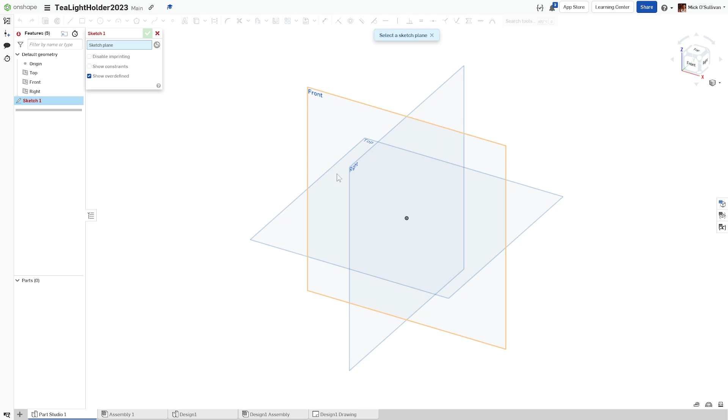I'm going to select the right plane. So I've got right plane there. If I wanted to change it, I'd just click on the little cross and pick another plane. But I want the right plane. That changes from red to black, means it's valid now. It's got a sketch on there.

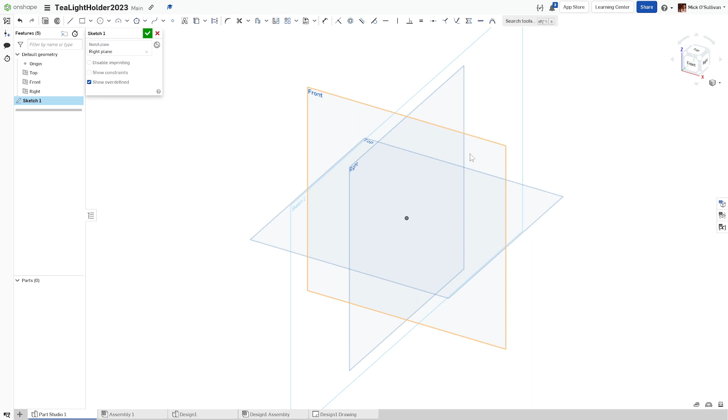I'm going to change over here and look straight down at my sketch by clicking on right there, and then I'll just zoom out a little bit so you can see I'm in the sketch, and I'm going to come up and draw the overall rectangle.

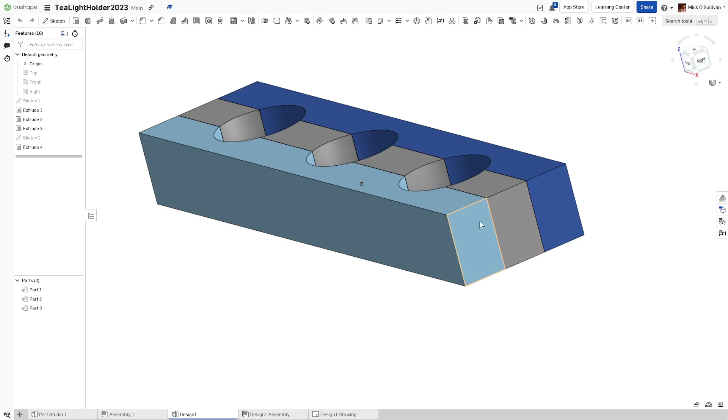I'm going to draw that big rectangle, all 3 of them in one go. So from this end here, and before you start on any design, you want to think about what the front of it is. So for me, I would consider that the front of my drawing.

When I do that, best practice would be to draw in the orientation that I want my finished object to be. It doesn't matter, it's not life or death, but it's going to make my life a lot easier.

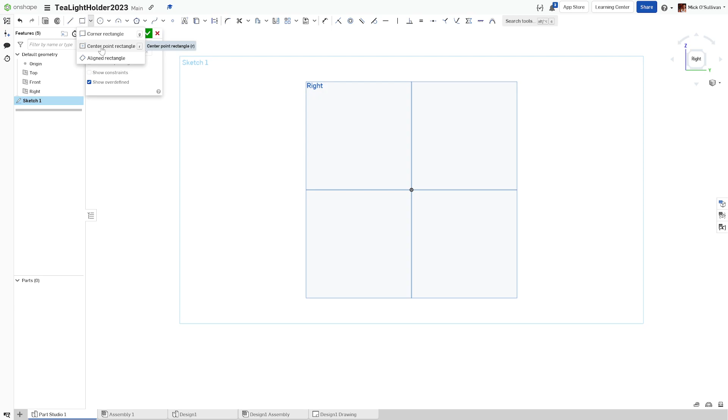So I'm going to change from rectangles, that's the shape I want, to a center point rectangle. The shortcut, if you look here, is the R key. I'm just going to select it, and I'm going to make that my center point, the origin. Click once, click again, and then I get a little box there.

Now, I told you it's going to be 19 mil thick timber, and there's going to be 3 pieces of it. I could use a calculator. I could do the calculations in my head. It's not a very hard calculation. Or I can go 3 times 19, and it'll do the math for me. Makes it a lot easier.

The height is going to be 30 mil. And I'm happy with that.

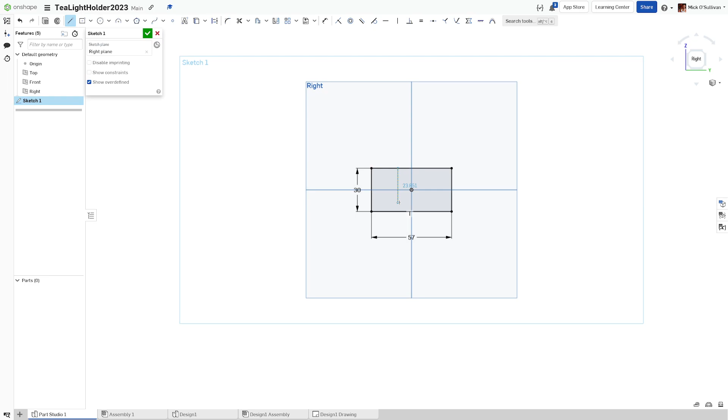Now I want to do those lines here and here to make it 3 pieces. So I'm going to take a line there. I'm going to draw a line from here. I'll see those little icons that appear. One means it's vertical, and the other means it's connecting with the orange line.

I'm not going to do it right in the middle because that will constrain it to the middle. See, the icon is middle. I don't want to do that.

I'm going to Control Z, press L for line, and draw from here to here. Make sure you see both those little icons, and not like this and not like that. See how the icons disappear when it comes like this? It's perfectly vertical and it's connecting.

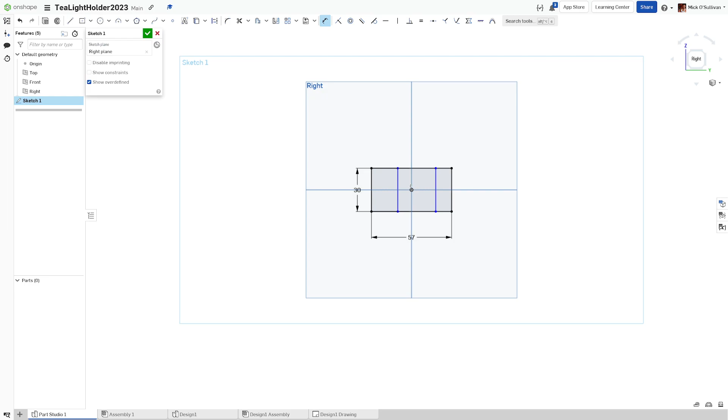Let go. I can't change that number because that is 30. I'm going to press D for dimension, and go from here to here is 19. I'm still on the dimension tool. I'll go from here to here, which is 19 again. That will automatically have to be 19 because I made the overall length 57. I'm happy with that. Tick.

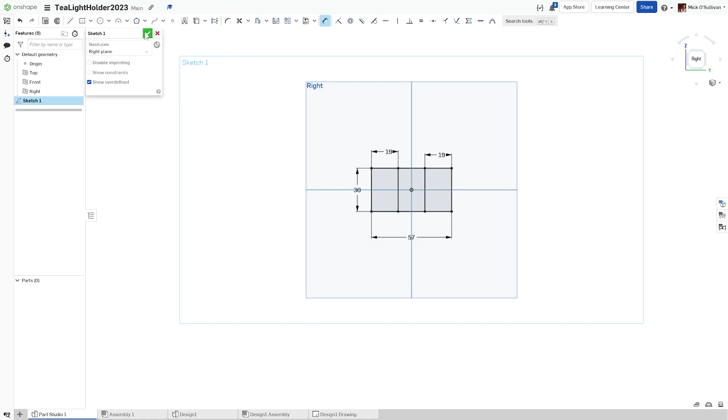The sketch is done. It's a 2D sketch with 3 rectangles all in the middle. I'm going to extrude it out, one at a time. First, I'll do that one. I know I want it to be about 250 mil long.

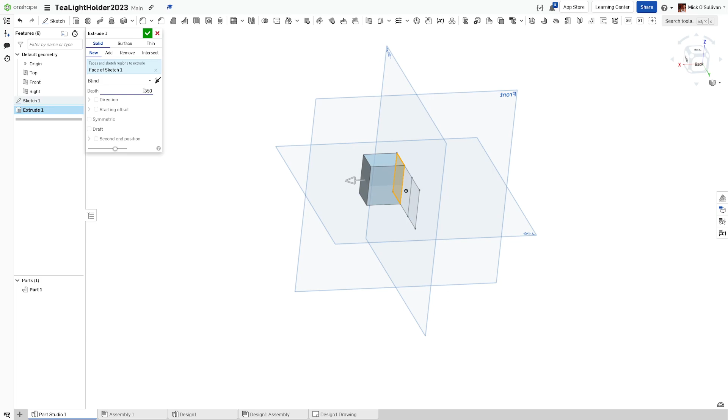And I have my part. I'm going to use a button I probably didn't cover in class - symmetric. If you can see what that has done, all it's doing now when I click symmetric is extruding really from the middle out both ways. There's a reason why I'm going to do that, and I'll tell you in a second.

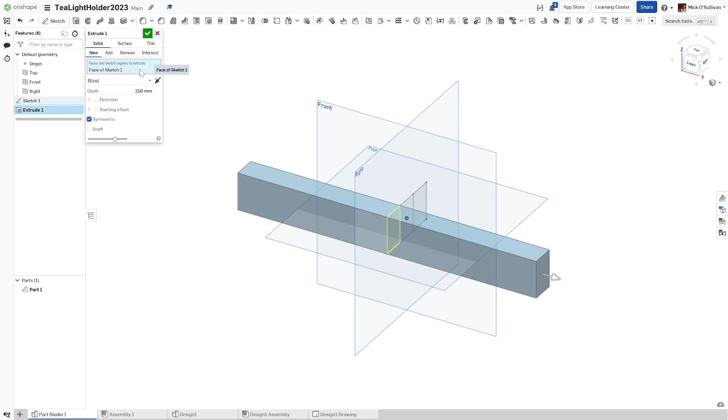I'm happy with that part. I'll tick, and I've got part 1 down here. That is it. Now, the sketch gets hidden by default, so I'm going to click on the eye icon next to the sketch and show it again. It was hidden, not deleted, just hidden. I'm going to do the same thing 2 more times.

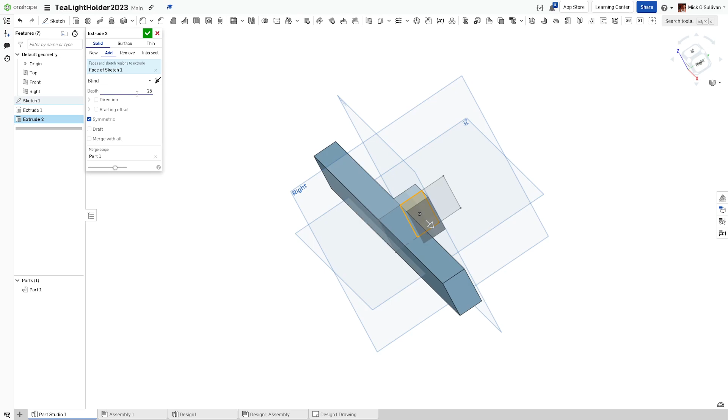So I'll extrude, click that middle rectangle, click symmetric, make it 250 - as you can see here, there's no second part there yet. I'm going to make it a new part, and look, I've got two parts. Tick. I'm going to do the same thing again.

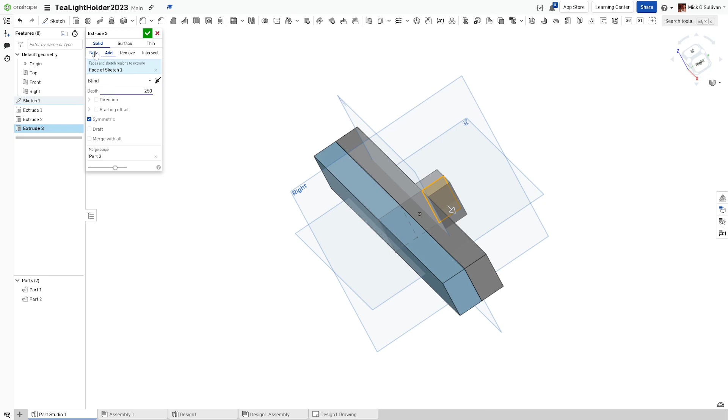So the rectangle I haven't done yet, symmetric, 250, new part 3. I've got 3 parts now. Tick.

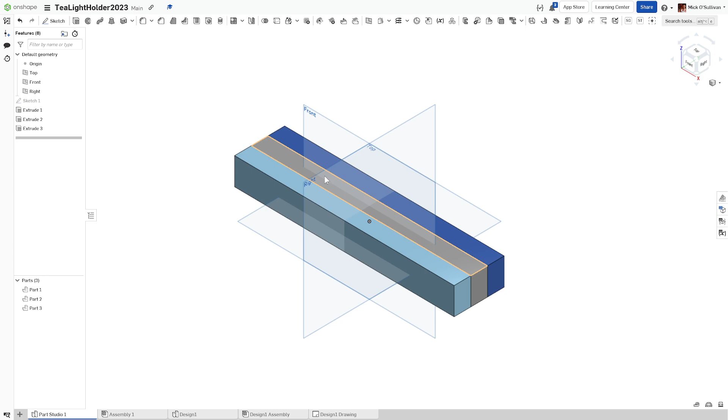So there we go, I'm going to look at it in isometric view. I'm happy with that. I won't need to use that sketch again, so maybe I'll hide it. While I'm at it, these planes - I don't need to look at them either, so I'm going to press P to hide them as well.

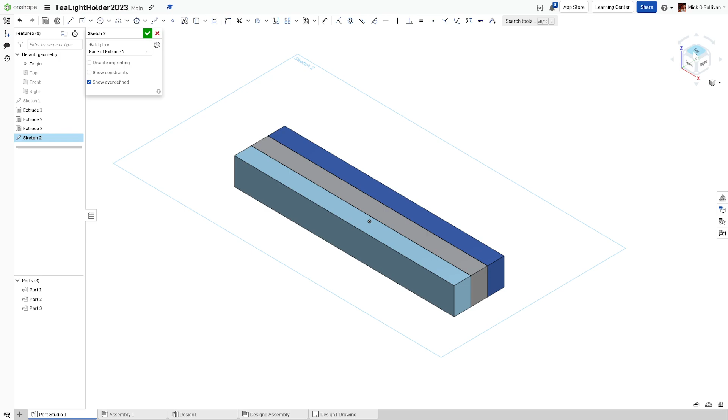Now let's do another sketch. This time the sketch is going to go on the very top face of one of these pieces. It doesn't really matter, but I'm going to do the middle one. I've got a sketch laid on top of it. I'm going to look straight down on it by pressing the N key, or I could click on top, or right click and go view normal to sketch plane.

There we go. Now, if I press P and show the planes, you can see I've got a plane going right through the middle - right through the middle. So that makes this a lot easier.

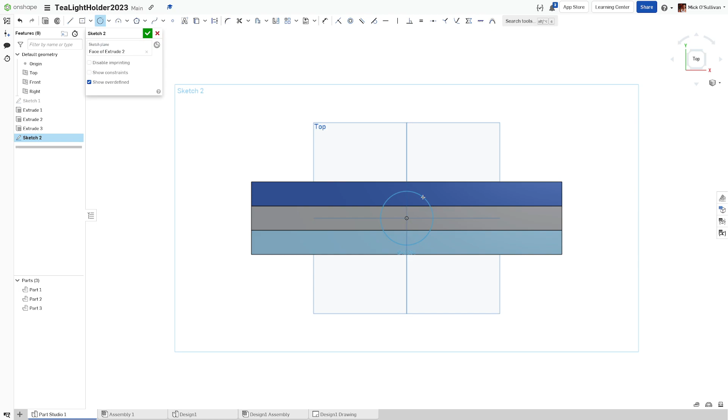I'm going to pick a circle, come right to the dead center. The middle one is going to be dead center. I'm going to bring it out a bit, click once, and type in the diameter, which is 38.

While I'm there, I'm going to come over here and do another one on this line. See the little icon means line, right on the edge of the plane, 38. And over here, same, 38. That's the size of the drill bit, that's the size of the candle.

I will need to dimension a few little things. That one there is locked in place. These two, if I click them and drag them, they can't move anywhere off that line, because the first time I started my circle, I started on the edge of that plane - they're locked into that position. I'd have to delete that constraint if I wanted them anywhere else.

Okay, I want them even. Now, I'm not going to do a lot of fancy mathematics. I'm going to take that dimension, drag it down the bottom here, drag this one down there, and that one down there.

I do notice a lot of students have it all bundled up together like that, and you want to be able to read it. You want to be able to make changes if you need to. So it needs to be clear.

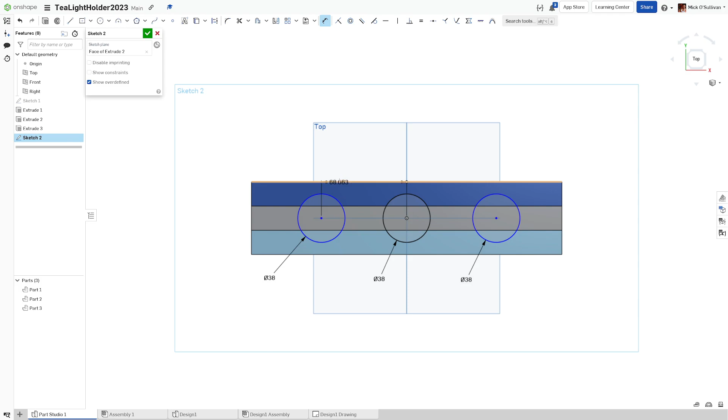Now, I could dimension from the end to here, but I think I'll use the center as my reference point. I'm going to make that 75. Seems like a good size. That looks like it gives me pretty good distance, but I could change it if I wanted to, 72, whatever.

Maybe for my design I want to go a bit further to the end. So I can change that, whatever I want. I'm going to keep it at 75 though.

And now while I'm still on dimension, I'm going to do the other side. From there to there, bring it up out of the way, 70 millimeters. Maybe I'll put that right in the middle. Okay, I'm pretty happy with that.

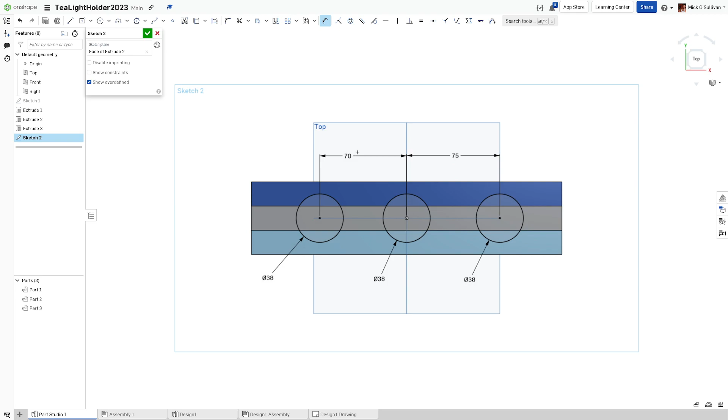On second thoughts, I'm going to give it another 5 mil away. I would assume for this design it would want to be symmetrical. And I'm going to go tick.

Now I'm going to go and remove that material. I'm going to glue it together, mark out where it goes, and then I'm going to drill it. So extrude, this time it's going to be remove, and I'm going to pick all these parts of the circle.

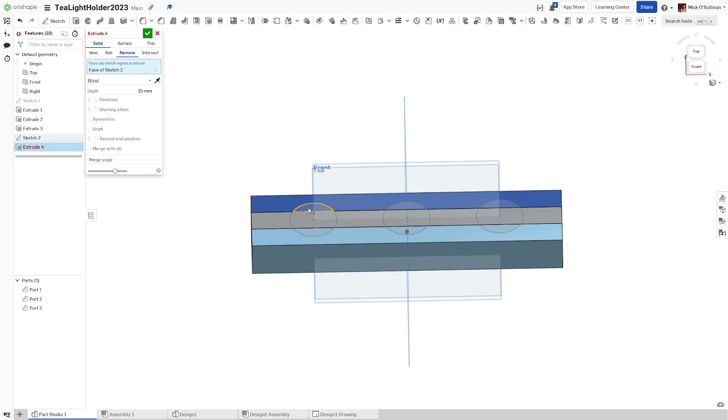There's really 3 parts to each circle now, because there's 3 parts in the job. So, like that.

I might show you from the side here. So I'll go to the front. I'll change my view on this little icon here to translucent. You can see it comes down 25 mil, so there's 5 mil space there. I could bring it down even further, all the way through if I wanted.

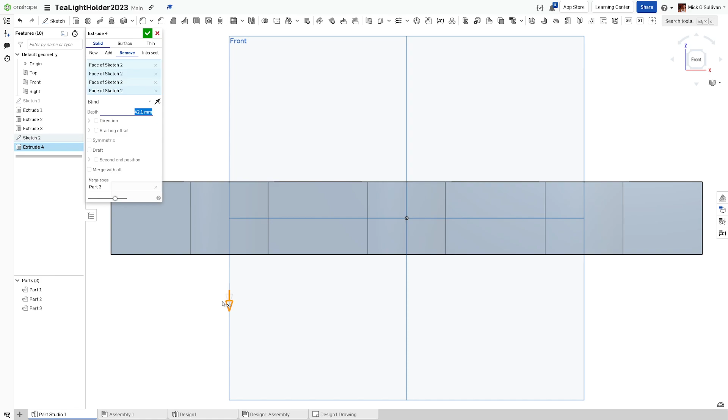I'm on remove. There is one thing I will have to do: click on merge with all, because at the moment the only part it's cutting into is part 3. I'm going to go merge with all.

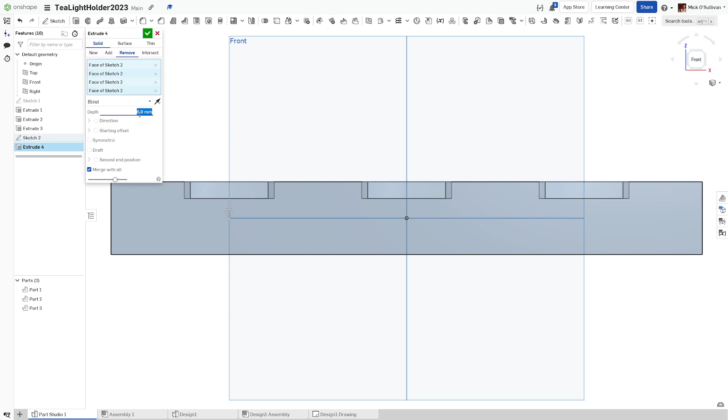Now I'm going to go back and look at the front. My candle is about 16 mil high, and I want it to be above the top face. I don't want it to sit flush or be under that face.

So I will take mine down about 12 mil. I'll set my drill press depth to go down 12 mil, no more, and it'll stop. Every time I drill these, they'll be the same height. And that means my candle will stick above that surface about 3 or 4 mil, and look pretty good and be

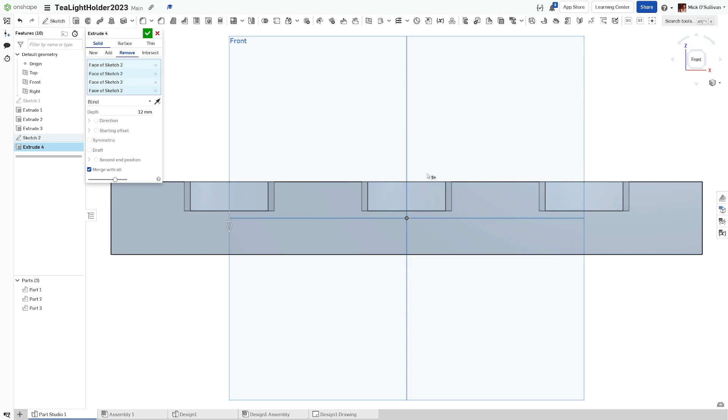easy to remove. Sorry. Okay, I'm going to cut down there 12 mil. And I think I'm happy with that.

I'm going to change my view so you can see it. Back to shaded. And go tick. I've got 3 holes.

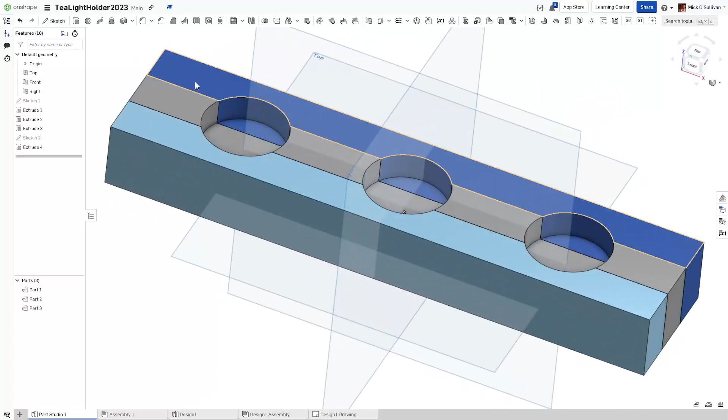Might hide the planes again so you can see. There we go. That's my basic design. I have 3 parts here.

Now, this is just the object, the modeled object, the model, the mesh. What I want to do is come into the assembly. It's not going to be very hard.

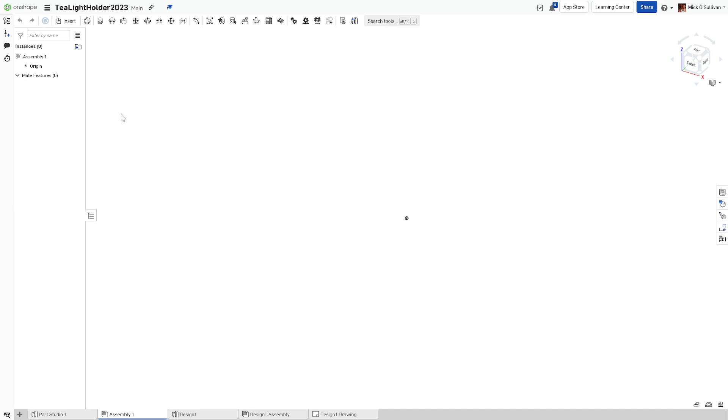And I'm going to go insert, part studio 1. You won't see that design one, that's the one I did down here. And I'm going to take part 1, part 2, part 3.

Now they look like they're together perfectly. But if I was to grab one, they're not glued.

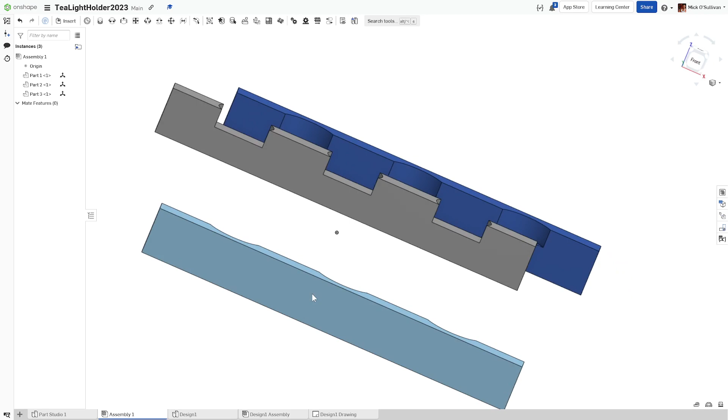The purpose of this, now we would drill it when it was glued together, but for this, we want to glue it together now. Okay, I'm going to use this little fasten mate tool up here.

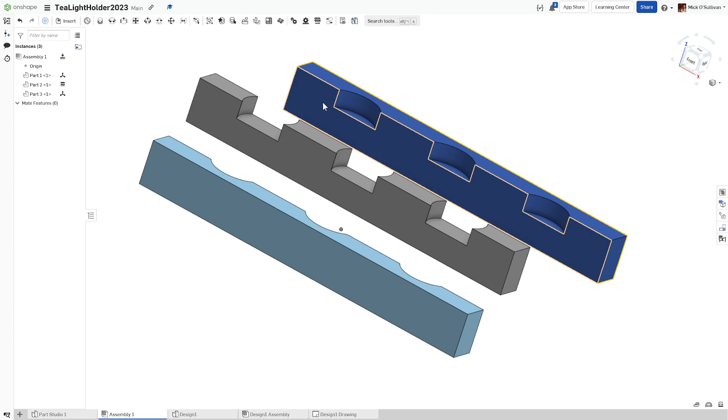But before I do that, what I'm going to do is pick one of them. It doesn't really matter which one, and I'm going to right click on it and go fix. Now that one won't move. It's locked in space, okay? Very useful when putting something together.

Going to go back and click fasten mate. It's red, it needs more information. It wants mate connectors. Now the way this works is when I hover over here, I get a lot of points of reference that I can connect to the other side.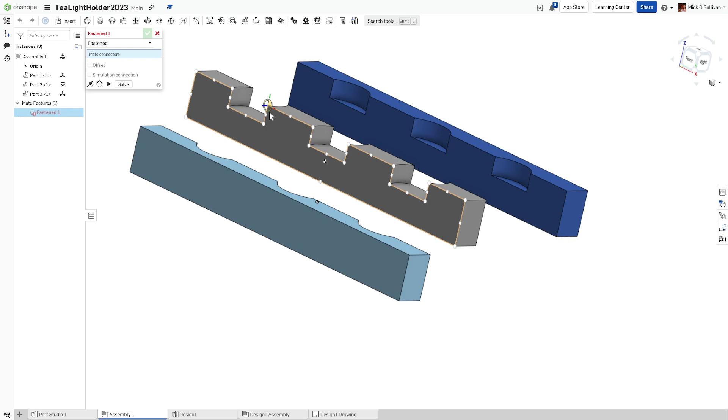That face there will be obviously that face there, identical. So I could pick heaps of different ones, and if I line them up exactly with their opposing position, it'll glue together.

Sometimes this tool can be hard, it flicks between faces. If I find the face I want to lock to, I hold down the shift key so I can move together. I could go from the middle, that'd be pretty useful, but I think it'll make more sense if I take this corner up here. So that corner is going to glue to that corner down here.

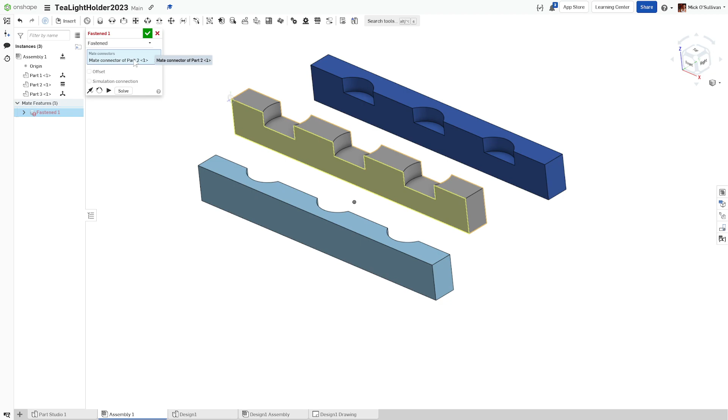Click once, it's added that part. Come down here, get to that face, hold down shift so it doesn't change on me, and click that one. Now I've got those two points glued together.

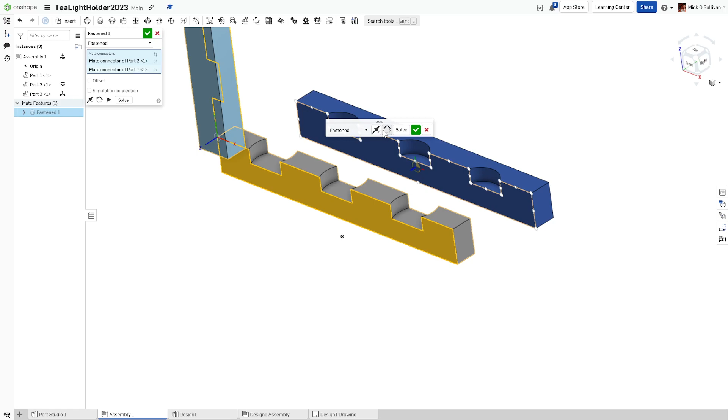If yours kind of looks like that or like that, you can play around with these two buttons here. Maybe your orientation's off a little bit. But if you did it the way I showed you, it should work well.

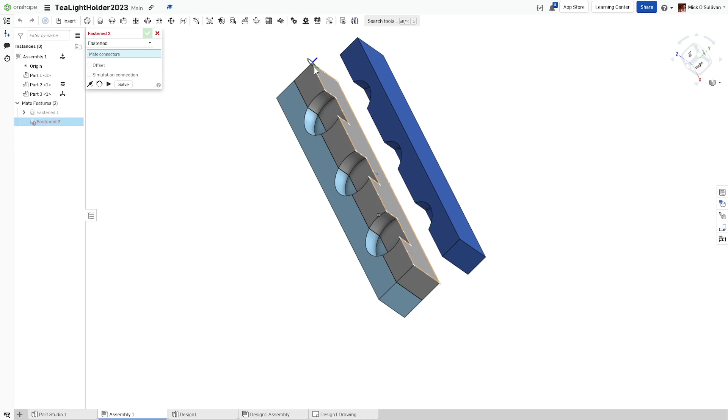It's still on fastened mate, mate connectors, which is useful because I've got to do this one over here. I'm going to do exactly the same, so hold down shift, click, hold down shift, click, tick, close. Now I have my assembled object. So component here, and then you assemble it.

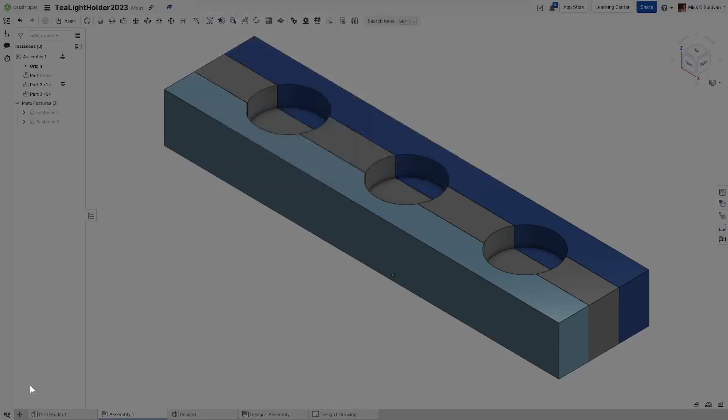Now you won't have a drawing, but we need to put in a drawing. So I'm going to click on plus, create a drawing. I'd like you to go across to custom template, ISO, make sure it's on A4 and not portrait, A4, and make sure it's 3rd angle projection. We'll leave the rest, and we'll go okay.

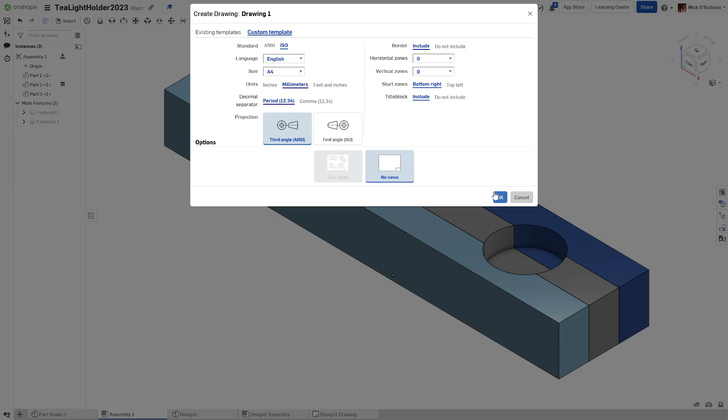So there's a blank sheet with a border around it and a title block. They'll be very useful. I'll come here to my assembly, and it's assembly 1.

Now if I look at this on my drawing, it's a bit small. It kind of tries to pick an automatic scale for you. Don't forget, you haven't drawn in scale, you've drawn 1:1 scale, but to get it on an A4 bit of paper it has to scale it down. What I would probably do here is change it from 1:4 to 1:3, because I drew it in the right sort of orientation. I'll start with the front.

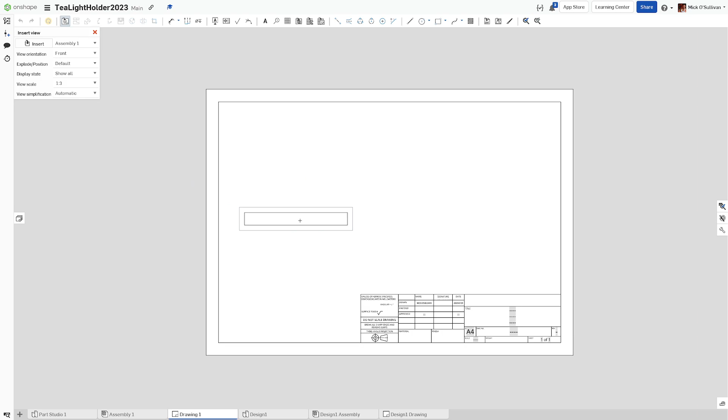So we're doing an orthographic drawing. We've got a front view here. Now as I move up, I'll get the top view. It'll stay in line because it's projection, I've still got that there. So I'll click on this again and bring it across to the right, and I'll get my side view.

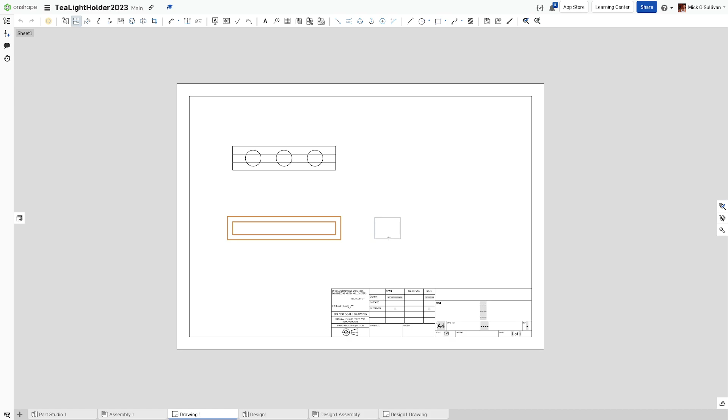Now I might put isometric up here, like that, because that's the way a good drawing should be set out. And now let's start to dimension it. Could shift this around, maybe a bit more balanced. Okay, so I've got a bit of gap there.

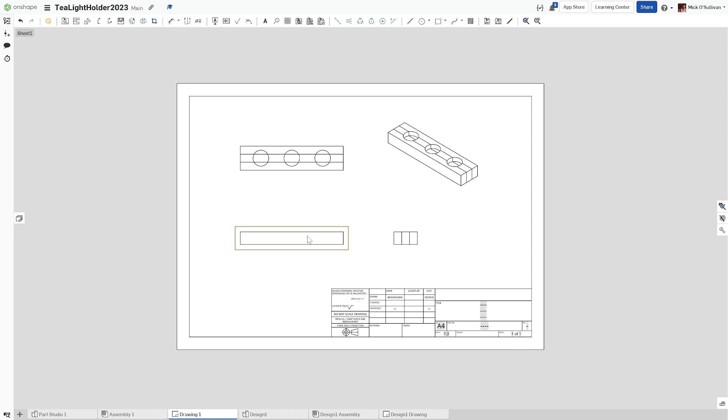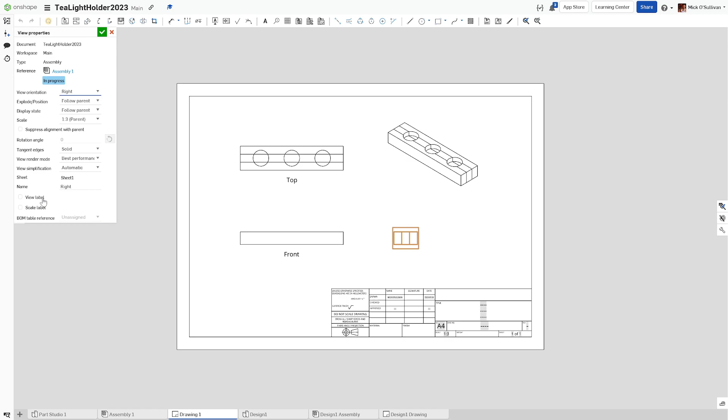Let's go through and do a few things. The first thing I'm going to do is label each of them: right click, view properties, view label. Right click, view properties, view label. Now obviously these are what they are, but for you guys learning, I think it's useful to have the label there so you can remember the order they go in. Front, top, right, that gives you your 3rd angle projection, and over here in the top right hand corner you have an isometric, which we might label.

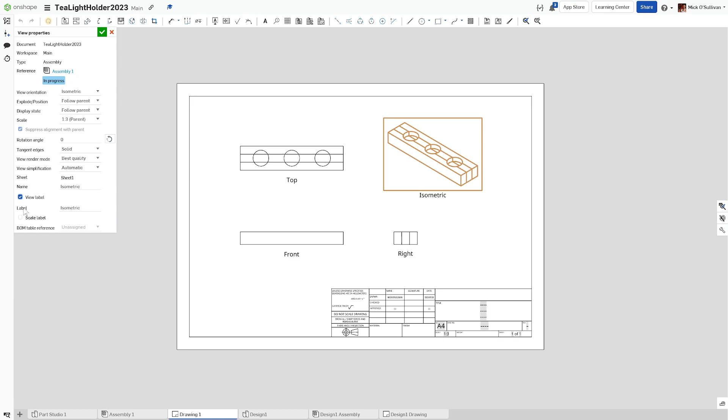View properties, and we'll also put the scale. I do not dimension an isometric, not very good practice. Sometimes I'll do it for you to kind of show you what things are, but generally an isometric, because of what it is, is just shown with the scale, and you measure from that and work it out yourself. So that's one to directly measure from. We've talked about that in class.

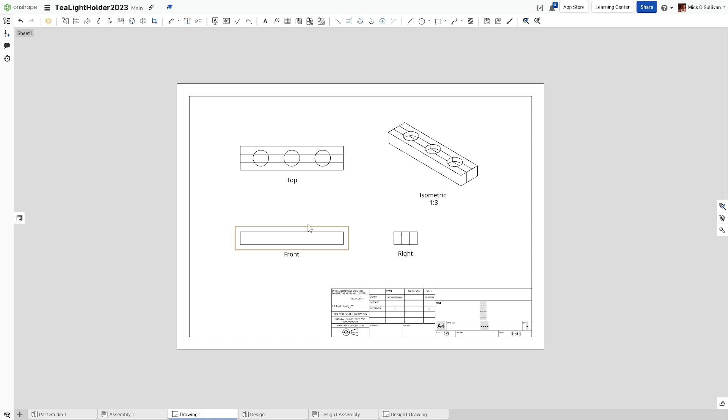A few things I need to show. The front view, it should be kind of, imagine it as a bit of glass and you want to see through it, which means you would see the bottoms of these holes, which you don't. I'm going to right click on it, go show hidden lines. Right click, show hidden lines. Now hidden lines are dashed lines like that, that indicates a hidden line.

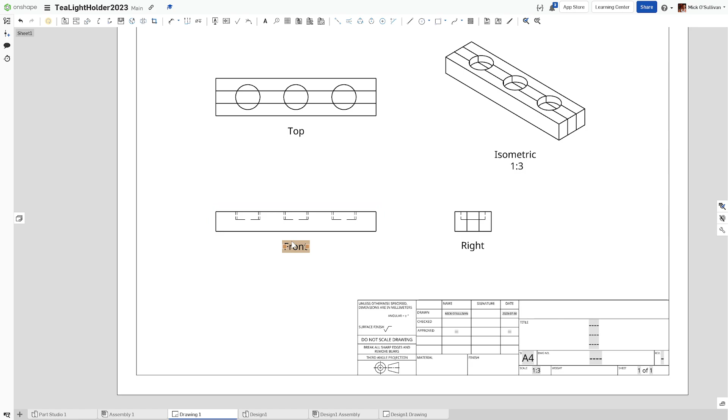Now we need to add some dimensions, okay? Clear dimensions that we can use to make it in the workshop or have someone else make it for us. Dimension tool over here, or press D on the keyboard, and I'm going to go click, click, and right in the middle, 250. I'm going to go click, click, and I'll go 57.

I'm going to go click, click, and see how it lines up with that there. So I want my dimensions to line up. I want one to go one way, one to go the other. And I don't want to change that. So over here, I might even...

Now, you would assume they're the same distance, but we can't guarantee that. So what I might do is over here, I'll bring it up like that, 19 mil.

Now we have to put in a few more things. We're going to change the dimension tool to a diameter dimension tool. And I'm going to pick this one over here and bring it down to maybe a little bit like, maybe there.

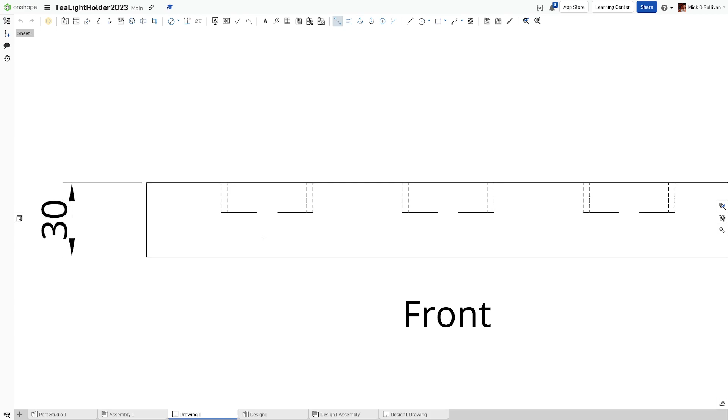Then I'm going to do a couple of other little things. Over here, we have a 2-point center line. I'll show you how that works. Now you need to show, if I didn't have that top view, if I just had that side view, I wouldn't know whether that was a square hole or round hole. To show it's round, I'm going to use a center line. So I'm going to click on there.

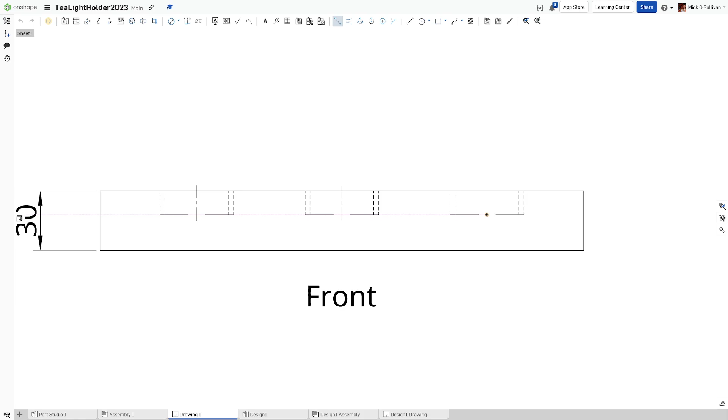Let's do it again. There, there, and I've got a center line. There, there. Now a center line is a long line and a little dash, long line, small dash, long line, small dash. I'll need to put that on here too. Shows me that's round.

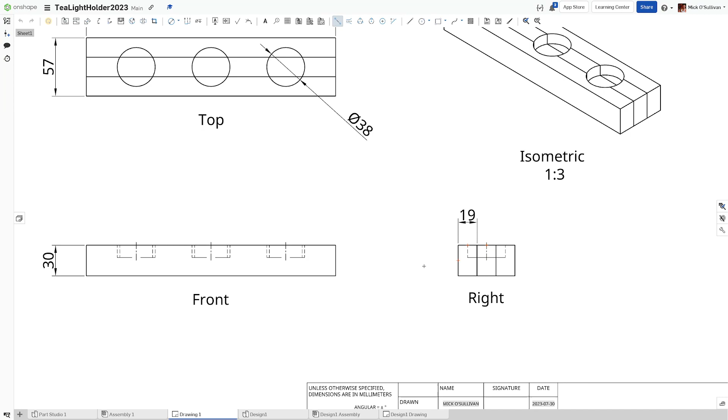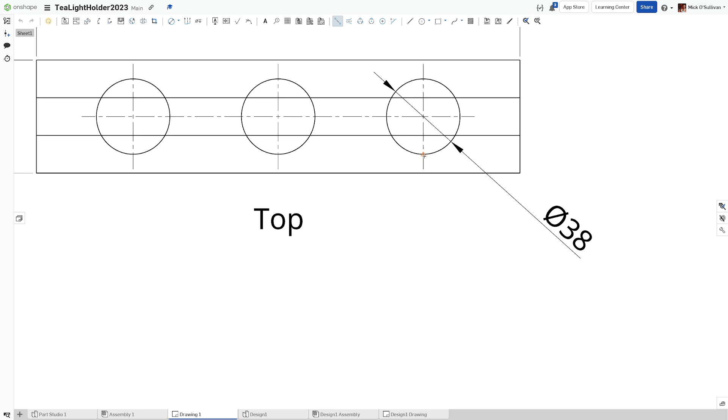And let's do these up here. Now these ones will need to go one there, one there, one there, one there. They're also giving me the intersection where I'll have to line up to drill.

I'll need to also do a dimension from here to here. I might put those on down here. D for dimension, there to there.

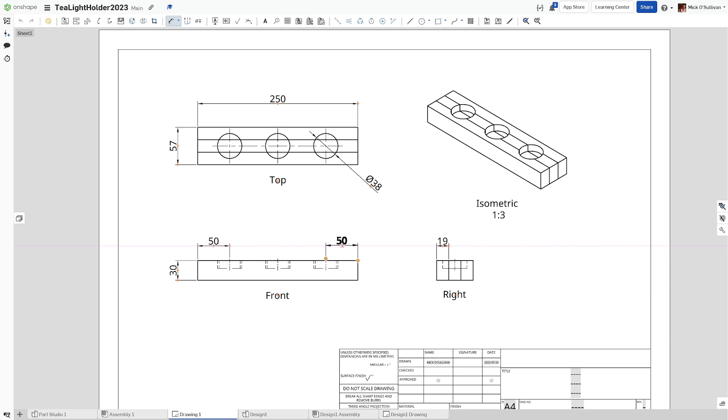And then just in case, I'll do a dimension from... now, if I did that dimension there, I can see where that could cause a problem. I want this drawing to be really clear. I'm going to go from here to here. Line it up. And I think I've pretty much got everything I need in my dimensions to make that job.

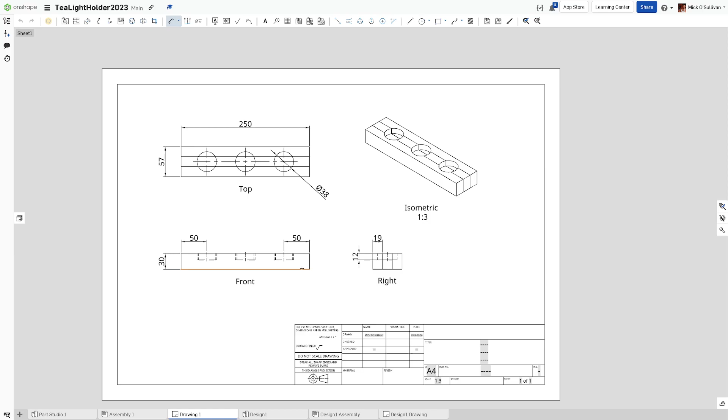Right now, except for one thing, I haven't got the depth. I'm going to click, click, click. 12 mil. There we go. That should be everything I need.

Now down on my title block, I need to put a few details in. I have the scale 1 to 3, that's good. I have my name, I have the date I did it, and let's give it a title.

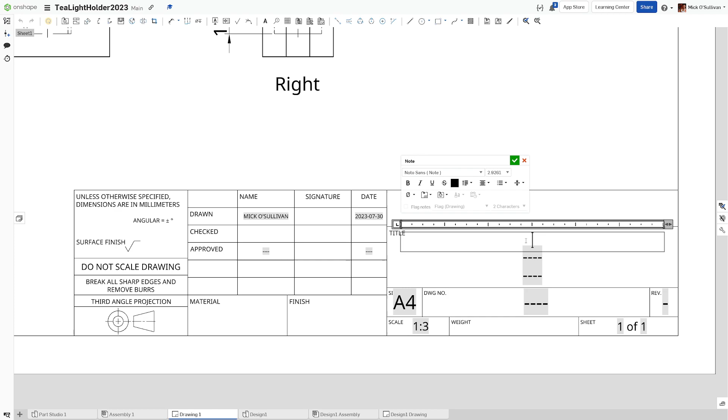Double click on there. I'm going to use all uppercase for this, so once again there's no mistakes, and I'm going to call it Tealight Holder 2023.

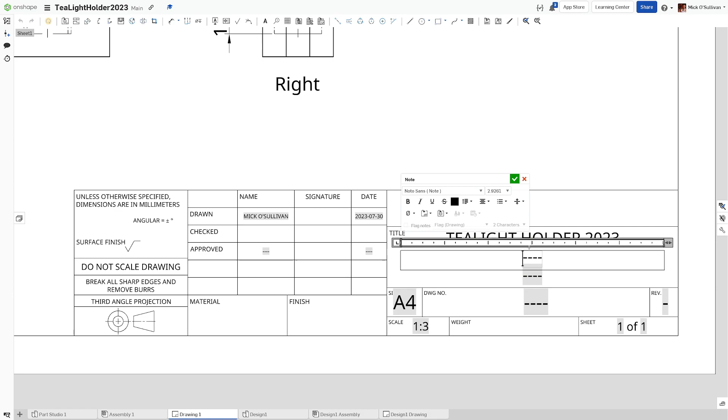I'll come down to the next line. Double click on that, and I'll say year 7, semester 2. Hit enter.

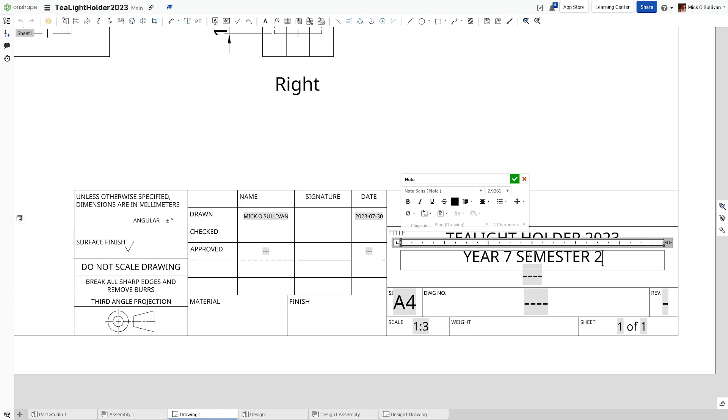And in there, I'll write, and down here I'll call it drawing number 001.

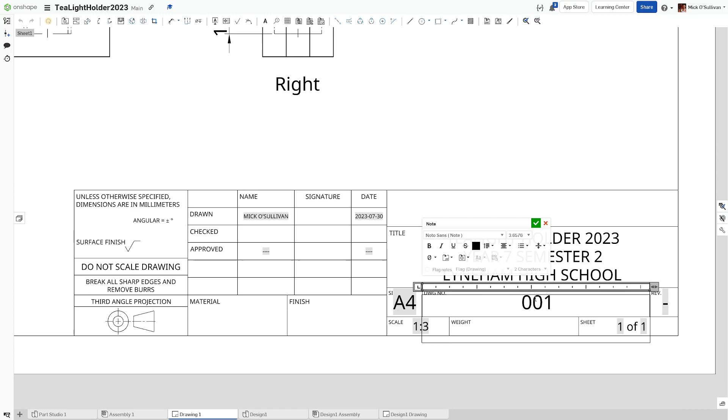It's pretty good. Not worried about revisions, materials.

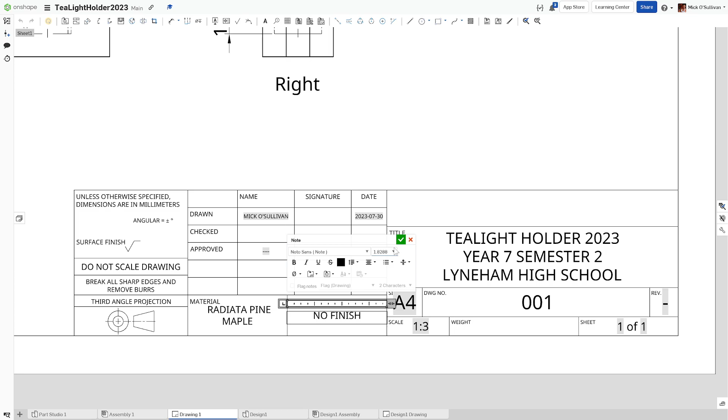And I'll put no finish. Finish would be an oil or a lacquer. Because we're going to have candles in it, we don't want it to catch fire. So we're not going to put any oil on that. No finish. That should give us all the same. Okay, there we go.

I've got my part, got my assembly, got my drawing, fully dimensioned. I can't see any missing dimensions. I've got my isometric in there. I've got it laid out in third angle projection. I've got it named, I've got my name on there, ready to be printed and taken into the workshop.